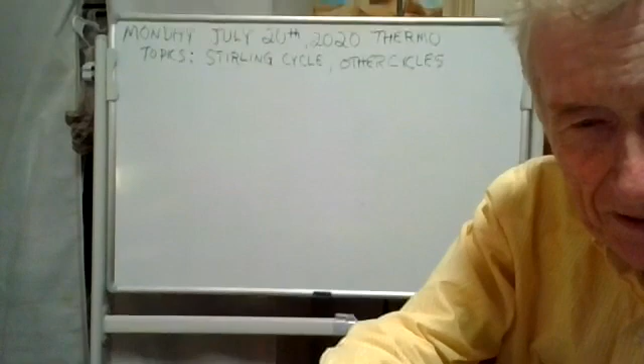So it's just you and me right now. How are you today, Spencer? No major complaints. As they say in the Ozarks, it's tolerable.

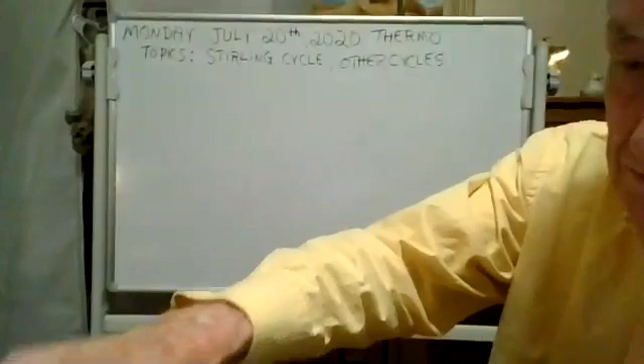Now today we're going to study really the last new topic, and that's the Stirling cycle. Then I'm going to go over some review stuff to prepare you for your final. And Wednesday, I don't think we're going to have anything new - it might be new to anybody that hadn't been paying attention, but I'd like to go over some of the important things in the course on Wednesday. But right now, the topic is the Stirling cycle.

And the Stirling cycle has - what we're talking about, the Stirling cycle - it has two isotherms, and two isochores.

I wonder if I'm writing big enough for you guys to read that. Maybe, I think you could probably read that. Let me find another one. This one's not dark enough.

So here, let me draw it for you. We're going to draw a Stirling cycle. Now we're dealing with air here - it doesn't have to be air, but it'll be an ideal gas. So we don't need a vapor dome.

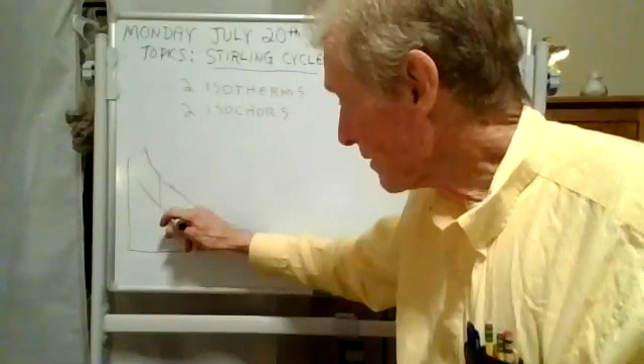So if you start here at 1, you go up this isotherm here to 2. And then you go up this isochore to 3. And then come down here to 4. And then down here to complete the cycle, you're back to where you started. It's a cycle, it's a Stirling cycle. See, this is compression here because the volume's getting smaller.

And then what are we going to call that? Well, there's an ignition there. There's a heat transfer in somehow. You have to have some fuel. These heat engines don't work unless you fill up the tank with gas or whatever it is you're using for fuel. So you have a heat transfer in there.

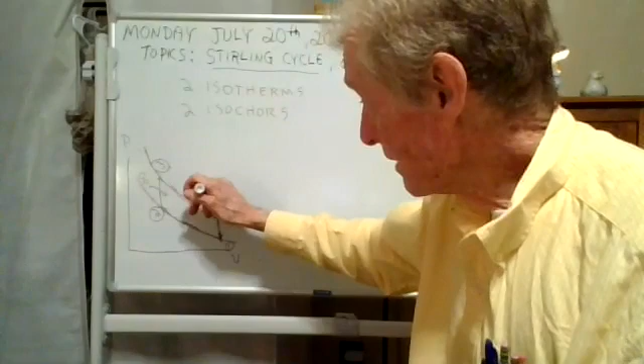And then 3 to 4 is your power stroke, but there's a heat transfer in there too. You could label these. This would be Q34, that would be Q23, and then there's a heat transfer out here. There's 4 heat transfers. This one's Q41.

But we don't speak of exhaust because the Stirling cycle is a control mass. There's no mass coming in and there's no mass going out. It's a cylinder, piston cylinder situation. Now here's the heat transfer during compression from 1 to 2. There's 4 heat transfers.

Okay, and it's a control mass. So you would use the control mass version of the first law, wouldn't you? All right, well, let's do one. Any questions so far?

Well, I think the one I want to do is 1081. Let me find it. Chapter 10, number 81, says here, ideal Stirling cycle.

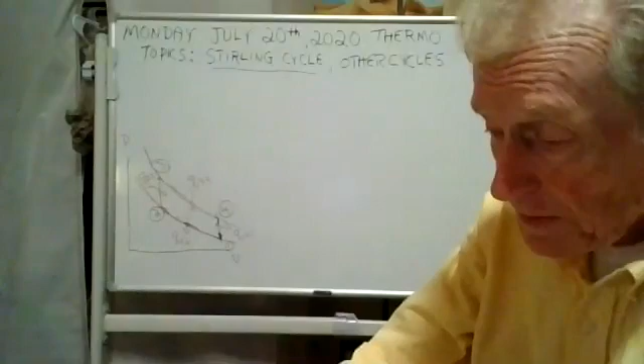You were doing an ideal Stirling cycle. Now you have to know that they have real Stirling cycles out in the real world. They exist. They have Stirling engines. They've had them for years and years and years. They've had them in the oil field for running oil field equipment. They've had them on boats. There's even a Stirling engine, it's actually a refrigeration cycle, on the space shuttle, I understand. So this is a real thing. It exists in the real world.

Now this one uses air, and it says here we start with 50 degrees Celsius. So here, let me write that. This is 50 degrees Celsius and 100 kilopascals. So over here, that's 100 kilopascal. Compression ratio is 6.

Well, let's make a note of that. R equals 6. In other words, V1 over V2 is 6. You could write it like that. You could say V1 over V2 is 6. Maximum temperature is 900. Well, that's this one here. This is the 900 degrees Celsius. See, the low temperature is 50, the high temperature is 900.

Calculate the maximum cycle pressure, we'll do that, and the thermal efficiency, we'll do that with and without regenerators. Well, we'll explain what regenerators are in a little while.

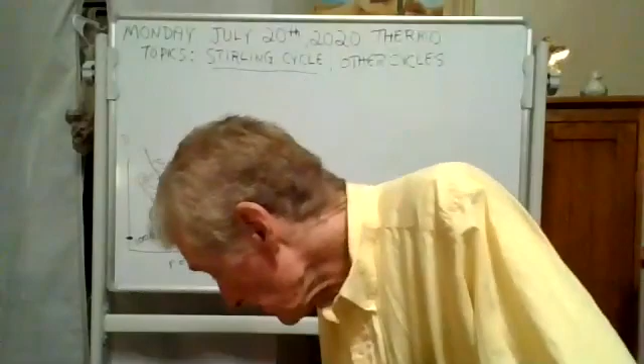This engine, if I remember, was invented before the Civil War, 1846, I think. But don't quote me. You could look it up on Google. But it's been around a long time.

And for a while there, in England, it was invented in England. For a while there, it was in competition with the steam engine. Now, they had the age of steam, but if the Stirling engine had been favored over the steam engine, it would have been the age of Stirling. But the steam engine was preferable, and I'll tell you why here later.

But let's go ahead and work our problem now. We're going to do problem 1081. And you know how I like to do these. We have so much fun doing these tables, these property tables that have energy transfers.

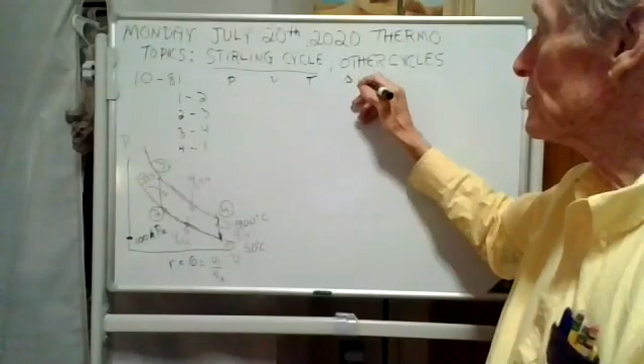And we're going to do a Stirling cycle. P, V, T, and delta U, Q, and W. There we go.

Now this one is in SI. It would also be fun to do one in English, wouldn't it? I bet you guys would like that too.

Okay, well now according to the problem, we're going to do 1081. If somebody just showed up, we're doing a Stirling cycle. Let's see if there's any new students that showed up here. Let's see. Parker, yay, Parker showed up. We got a good crowd here.

Anyway, we're going to do problem 1081. It's a Stirling cycle. And they said at state 1, temperature is 50 Celsius. We might have to change that to Kelvin later, but it's okay right now. And then the pressure is 100 kilopascals. Kind of ran out of room there. Let's see if we can squeeze it in here. Kilopascal.

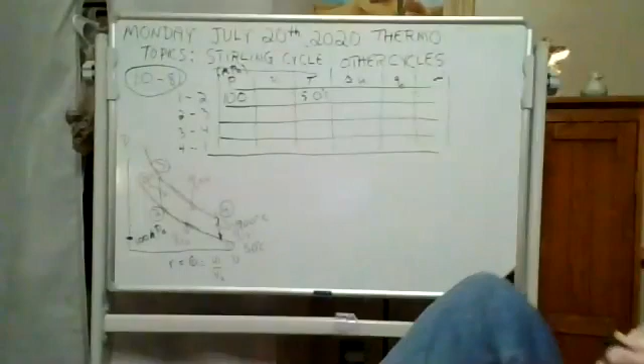Okay, let's take time out. And what I want you to do is to find the specific volume. Okay, go for it. It's state 1. Don't forget, it's got to be in Kelvin or it's no good.

Are we using air for this? Yes, this is air. We are talking about air. But thank you for asking. Well, I got an answer. I'm not at all sure it's right. Let me do it again.

Well, I got an answer. Did anybody get 0.9274 cubic meters per kilogram? That's what I got. I bet that's right. We're off. We're doing great.

Now, if the compression ratio is 6, then you can get V2, just divide that by 6. Here we go. We're going to divide that by 6. Get your calculator.

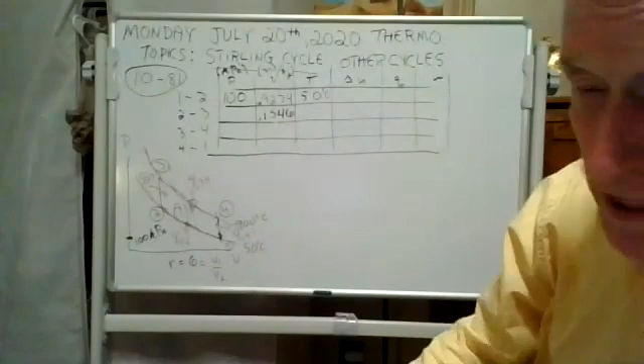Okay, well, we got the V2, if you understood that. Now here's the beautiful thing. V2 and V3 are the same, so you can fill those in. Look at there. Isn't that nice?

Not only that, I can fill in V4. V4 is the same as V1. Can you guys see that? It's 0.9274. Any questions?

Okay. Now, what do we know about these temperatures? Well, see, state 2, you know what? The temperature at state 2 is the same as it is at 1. You're going to like this. This is a nice little problem here. It's easy. And see, the temperatures at 3 and 4 are both 900.

Now, we did these in degrees Celsius. That's fine. You have to put it in Kelvin though when you use the ideal gas law. Okay, now we're going to take time out here for just a minute, and we're going to use the ideal gas law to get these three. I'll be quiet, and I want you to get those three for me. On your mark, get set, go.

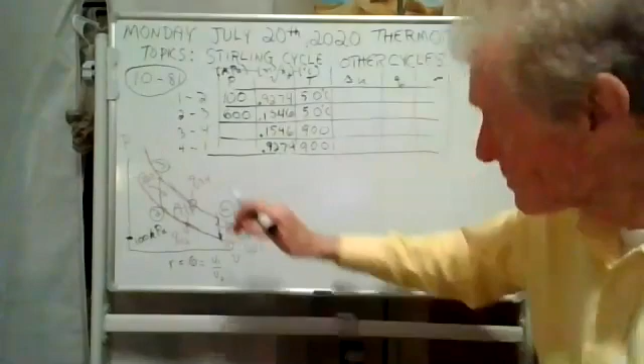Well, I got some answers. I got 600 here, 600 kilopascals, and I got 2178 for this one. Kilopascals.

I got to check up on you guys. I got to make sure that people are still awake out there. Let me ask one of my wonderful students, Spencer. Spencer, do you have this pressure at state 4 yet? Do you have that yet, Spencer? 363.04 kilopascals. That's what I got.

So you guys are with me. I think we're doing fine. Now let's do this, the change in specific internal energy. That's what that is. Okay, well, here's the equation.

It goes like this. Now this equation doesn't always work. It only works if you have an ideal gas, but we do. We can treat air like an ideal gas, so it's good. But see, going from 1 to 2, there is no change in temperature, so this is 0.

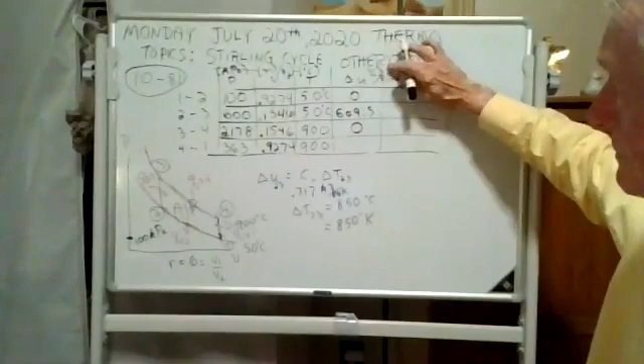Now what about from 4 to 1? Well, you know what? It'd be the same. It's just negative. It's the same change. It's just that you're getting colder from 4 to 1.

Does anybody need my help? I'll write that out if anybody asks. Okay. Nobody asks, so I guess you're all right.

Now, 2 of these W's are 0. Two of these little W's are 0. And let me pick on one of my wonderful students here. Parker, unmute and tell me which ones of these work per masses over here are 0. Which ones are 0, Parker?

Would it be 2 to 3 and 4 to 1? I like it. Good going, Parker. I think you guys are beginning to catch on to stuff in this class. Well, that's good.

Now, how are we gonna figure the rest? Do you guys have any bright ideas? We need to fill in these boxes here. How about it? I'm listening for some good ideas. Go for it.

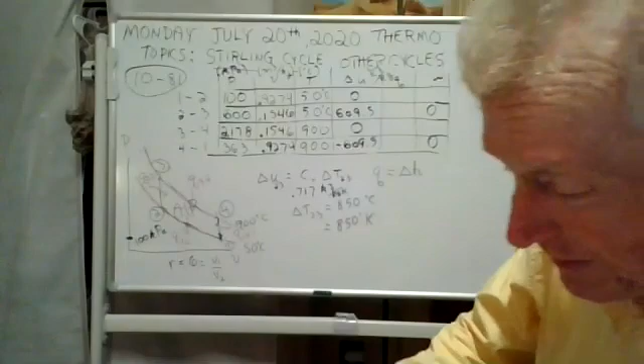But still stay away from the gambling, Cameron, it's not a good deal. The casino, yeah, stay away from the casino. But you're right, you can't use that. Now, Cameron, why is it that we can't use it?

There was a skull and crossbones on that equation here, let me put the skull and crossbones back on there. There's a reason why you can't use that equation on any of these. Cameron, what is the reason? You're right, Cameron's right, you cannot use this equation, for instance, to find these heat transfers anywhere here.

But why? Why can't you, Cameron? Because there's no specific heat. I'm not sure. Well, let me ask you this way, Cameron: when can you use this equation? When is this equation good?

It's only good if you have a very special kind of process. What is that process? Is it specific enthalpy? No, that's not a process. There are different kinds of processes like isos of this and isos of that, but this only works for a particular kind of process, Cameron. What kind of process do you have to use this equation? I'm not sure, I'm not seeing it in my notes.

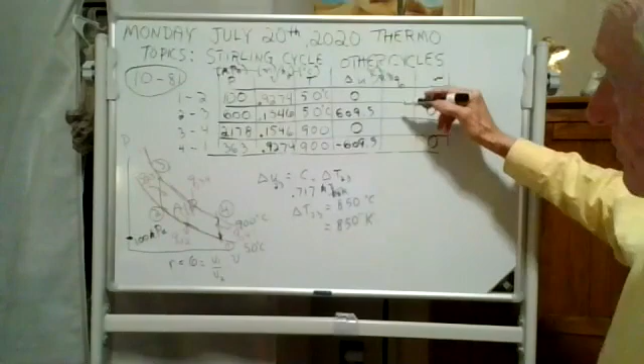Okay, well, we're back to asking you guys for some advice. That didn't work. Does anybody out there have any idea how to fill in those boxes? We've got 6 empty boxes there, and we need to fill them in. I'm waiting for some advice. Well, this might be a long wait.

Let me pick on somebody else. Aubrey, help the class. Aubrey, do you have any idea how to fill in those empty boxes? I know we can fill in a few using delta U equals Q minus W. Good idea, Aubrey, let me write that down. Aubrey's got a good idea.

Did I write that big enough? Yeah, you can read that. Hey, look at here, we can get these two, Aubrey, just from here, because if you know this and you know this, well, you can solve for that. Now, Aubrey, this one's going to be plus or minus.

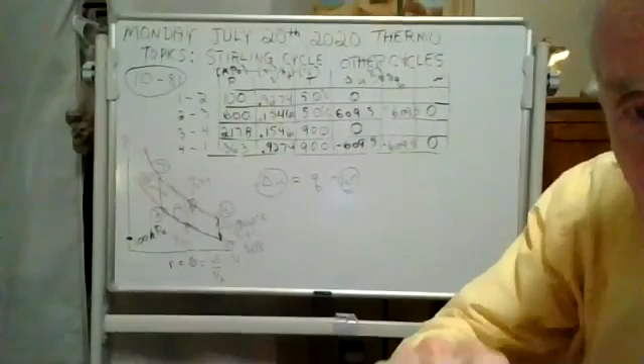empty boxes. Let me go to one of my other wonderful students. I'm always picking on Stuart. Stuart, the class needs those 4 empty boxes filled in. Do you have any ideas how to do those? Uh-oh, Stuart's not answering me. He's probably tired of me picking on him.

Can we use CP delta T? Let me try that. Now, there is a lovely equation that goes like this. We could get our delta specific enthalpy this way for sure. But that doesn't give you the Q, because the Q is not going to equal the delta H because we've just discussed that. There's no isobar, so I don't think that's going to help us any.

Well, let's go to my next victim here. Spencer, we got 4 empty boxes here. What are we going to do? Got any ideas? To find the work, maybe we could use RT ln V4 over V3. That's it. Good going, Spencer.

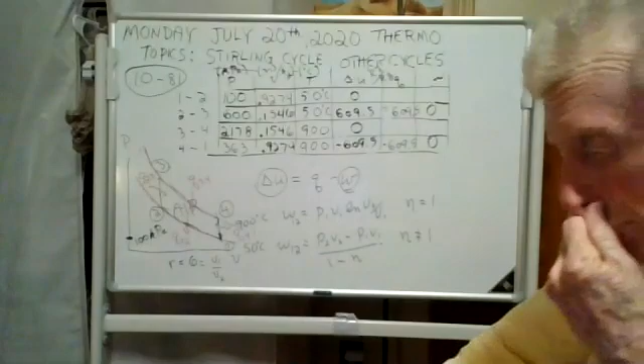See, this one here is when your polytropic constant is equal to 1. And this one here is when your polytropic constant is not equal to 1. Well, going from 1 to 2, the polytropic constant is equal to 1 because P1 V1 to the 1 power equals RT, and T is a constant. And so P1 V1 is equal to P2 V2 to the 1. The polytropic constant is a 1 for process 1 to 2.

This is the one we can use. You don't use this one, because if n is 1, you have a 1 minus a 1 in the denominator. And that is bad. Can't have a 0 in the denominator. You got to know when you can use these two equations. But we can use this equation here.

Did I explain that n is equal to 1? Do you understand? From 1 to 2? Because see, the T is a constant, the temperature is a constant. Okay, well, I hope you understand. All right, let's go ahead and work this out.

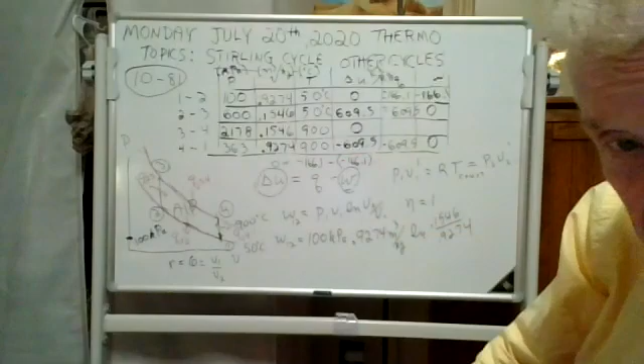It's going out. And algebraically, look, if this is 0, and if this is minus 166.1, and there's a subtraction, and this is minus 166.1, algebraically, it works, doesn't it? Can you guys read that? I wrote awfully small. But see, there's a heat transfer going out. It's negative. So you want a negative right there.

Now let's do from 3 to 4. We got 2 more boxes, and you know how to do them now. I'll shut up a minute and let you do those.

What we're doing right now is we're filling in these last 2 boxes, and we're actually doing this equation from 3 to 4. Here, I'll put in the 3 to 4 for you. From 3 to 4. See if you can get the work from 3 to 4.

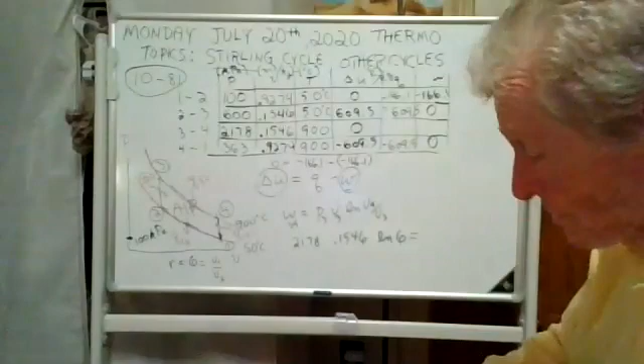Put that in your calculators and tell me what you get. I'm using my phone as a calculator. That's- okay, I'm doing the log part right. You should, maybe you did common logs. We want natural logs, maybe that's the problem.

Yeah, I would think- Never mind, I do. There's a difference between natural logs and common logs.

.32, that's more like it. 603 point- I got 3. I think we rounded off.

Now see, you can get this by using what Aubrey suggested. Look here, if you know this and this, you can get that. And I'll tell you what, it's going to be a plus or minus 603.3. What do you think, Parker? Plus or minus 603.3 right here? Plus, yes, it's plus. Good going.

Excellent. Now, does anybody need help with any of that, or are you okay?

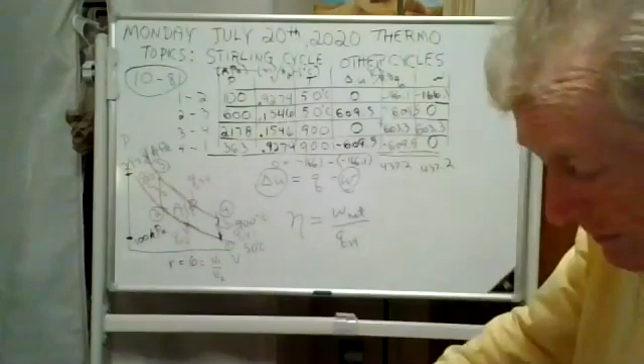But now wait a minute, there's 2 heats that you have to pay for. This heat, you don't get that heat free. It comes from burning diesel or gas, they have very many different kinds. They even have geothermal, they even have a geothermal heat source, but you have to get the heat from someplace.

But see here, the total heat transfer, you'd have to add the Q23. You'd have to add them up. See, there's 2 heat sources, so you'd have to add them up. So here's what you'd get: you get 437.2 over Q23, and well, you'd have to add these. That'd be 609.5 plus 603.3.

Let me add those up and we'll see what we get here. 437.2 divided by 609.5 plus 603.3. Did you get 36%? We have a 36% efficient Stirling engine.

Now, what they did back in the early days, and what they still do, is a very clever thing. It's called a regenerator. You see this heat transfer right here, this 4-1? They take that heat transfer out, and instead of just heating up Oklahoma with it, they recycle it around, and somehow they take that heat transfer, and instead of just wasting it, heating up Oklahoma, they put it back into the air inside your Stirling engine.

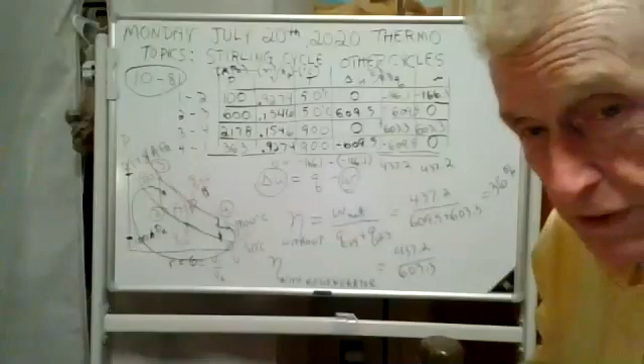Now, what that regenerator is - in the early days it's like a big box with a bunch of real fine tin foil, a steel wool. Did you know that steel wool can heat up and cool off 50 times a second? Do you believe me?

See, if this engine is spinning 50 times a second, what is that a minute? What's 50 times 60? Is that 600? No, wait a minute, I can't do it in my head, it's too hard. 50 times 60 is, you're right, it's 3,000 RPM, isn't it? That's what your cars are doing - you've got 3,000 RPM on your tachometer there.

Well, what we're saying is that steel wool, real fine steel wool in that regenerator, is heating up and cooling off 50 times a second. Gosh, that's pretty amazing. But so is the air in the engine - it's going from 900 Celsius to 50 Celsius 50 times a second. That's just a ballpark figure, okay? It might be going more or less than 50 times a second.

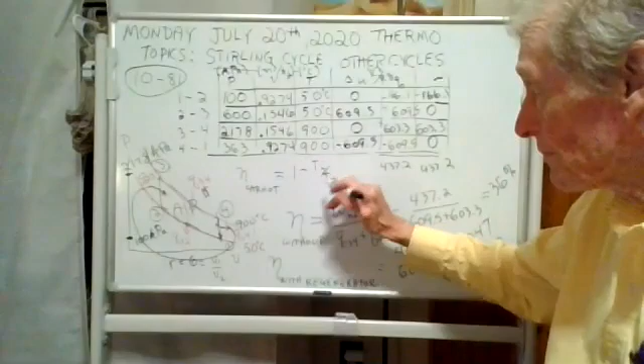Well, okay, I guess you're pretty happy with that. Now I need a little bit of room - here's some room right here. Now we've done the efficiency without a regenerator and the efficiency with a regenerator. And a while back we studied the Carnot efficiency. I don't know if you remember this equation, it's in your book. These have to be in Kelvin, but that's the equation for the efficiency of a Carnot engine.

Now this is not a Carnot engine, but let's just see what the efficiency would be if you use these temperatures. Well, it'd be 1 minus - you'd have to have that in Kelvin. Let me put 50 in Kelvin. I'm getting 323.15. And then this would be the 900.

I can't do that in my head. 900 plus 273, that would be 1173.15. Okay, now we're going to do that, and we're going to see what a Carnot engine efficiency would be operating between the same two temperatures.

Okay, well here goes, I'm doing that now - 323.15, and then you have to subtract it from 1. Well, here's what I'm getting: 0.7245. Well, I think there's a round-off thing, but look here - it comes out the same. It's a matter of a rounding off, I think.

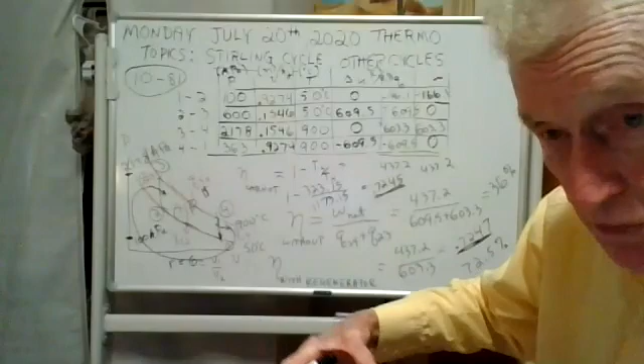So the Stirling is coming back. Now, the steam engine had problems too. The problem is you get terrific pressure built up when steam starts pushing against the container it's in, and if it's not built strong enough, it can blow up. They've had many explosions.

Steam engines have exploded. There was a steam locomotive over by Carthage, Missouri that exploded. The pressure got too much, and pieces of that engine—I forget how far away they went, but a long way, a mile or two. How would you like to be walking along and have a chunk of a steam engine come plopping down beside you?

So that was a big problem. People were being killed because of these explosions. But here's the thing, back in 1850 or so, they didn't have all the safeguards they have now. We have OSHA, workman's comp, occupational safety things, insurance. Back then, if someone was killed, they'd just say we need another worker, and there'd be a whole line of people waiting to get the job. Times were tough in those days. So they went with the steam engine in spite of its problems.

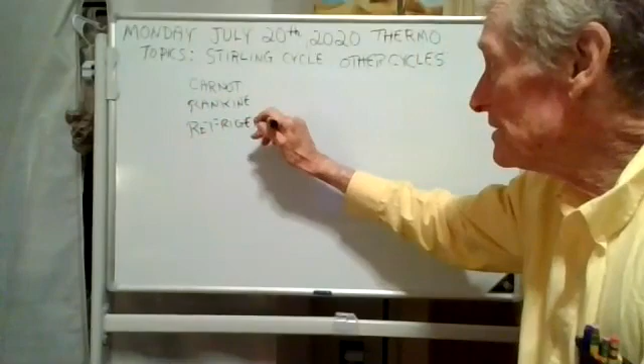Now, on your final, we've studied numerous cycles. Let me tell you what they are. We've studied the Carnot cycle, the Rankine cycle, and refrigeration. We've studied Otto, Diesel, Stirling. You will have one of those on your final, but we've done them all, and I'm sure you'll do fine. There'll be one of those tables of property tables with energy transfers with a lot of boxes for you to fill out. Each box is probably worth a point. We've studied all those different engines, haven't we?

Now let me tell you how the Stirling works. These are cycles that are going to be on your final exam. Now the Stirling engine, it's got a piston cylinder. See, this is the crankshaft, and it's spinning.

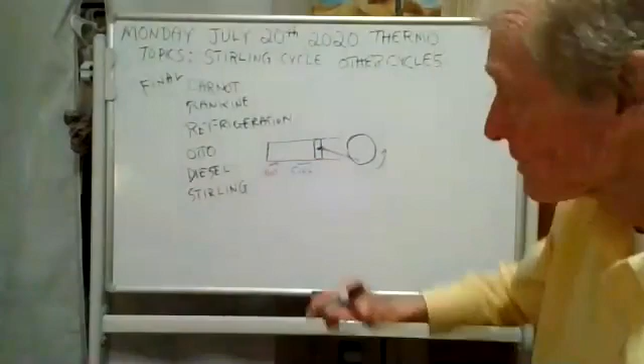They have something called a displacer. Now, it is not flush with your cylinder—it's called the displacer. When the displacer is going this way, what happens is the cool air is pushed around here, and it makes the air inside your cylinder cooler. And when that happens, when it gets cooler, the air contracts and the piston...

Let me do it this way. When the displacer is going that way, the crankshaft is turning this way, and the piston moves this way, and the volume gets smaller. Now, when the displacer goes this way, the very hot air here is pushed around, and the air in the piston gets hotter. But by that time, you're in a different position.

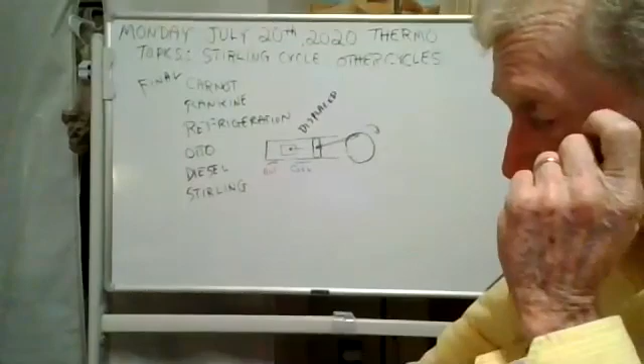You're like this, and the piston's turning like that, and the volume inside the piston is getting bigger. I don't know if that made a lot of sense, but that's the basic idea.

They have what they call a displacer that moves back and forth, let's just say 50 times a second. This thing here is turning 50 times a second. And if they're in sync—that's the secret. The secret is to get the displacer and the crankshaft in sync.

Well, they can do that. They're connected—the displacer is connected to the crankshaft, and it's going back and forth, making the air inside the piston hot and cold 50 times a second. Does that make sense? That makes it expand and contract 50 times a second, and that pushes the piston back and forth 50 times a second. That's the whole idea.

Well, I showed you that, and we talked about the Stirling engine. Now, in the actual Stirling engines they have this separate—they have the working piston and the displacer. They have them separate, but connected. Let's see if I can show you that.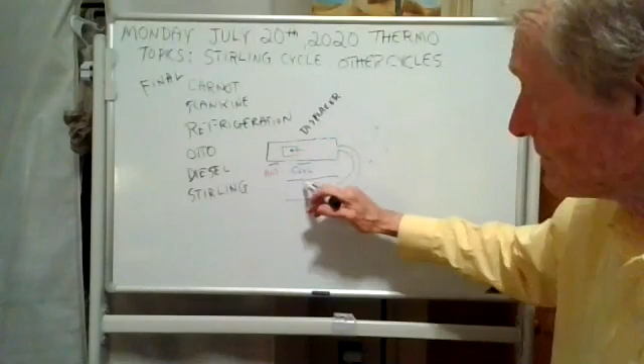Here, the displacer is separate from the piston cylinder. They're totally separate. But the air is contained in this displacer box and in the working piston. It's the same air. It can't get in, it can't get out. There's no mass that can get in or out. Whatever air is in here, in this connection, and where the displacer is, no air is being added or subtracted.

Nothing is said about a spark plug. I didn't mention anything about spark plugs. It doesn't have one. A Stirling engine does not have spark plugs. That's kind of nice. It's simple, really.

Are steam engines pretty similar to a diesel engine? Well, there's something you need to know about steam engines. Steam engines are external combustion. The firebox, the fire, is not internal.

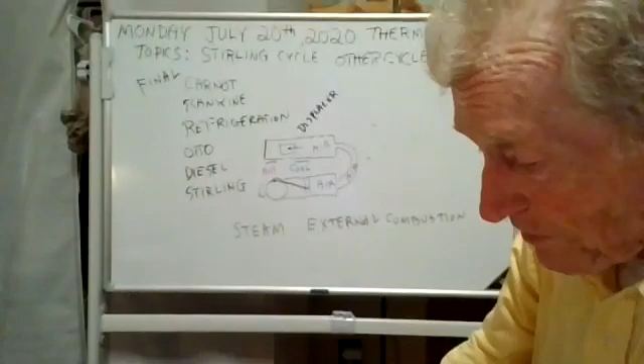But a gas auto engine or a diesel engine, for instance, is internal combustion. I don't know if you've ever taken the head off of an engine, but there's crud in there, soot and carbon build up inside. You have to scrape it off with a putty knife. They're dirty inside. The reason is you're burning fuel inside the piston.

Here, let me draw a piston for you. Here's a piston, and there's a spark plug right here. And there's some wires, and bam, there's an explosion in here, and you're burning fuel inside. See, Otto and diesel cycles are internal combustion.

And you don't always get a 100% burn. There might be some residue, some carbon monoxide, even incomplete burn. But steam engines are external combustion. You can get a complete burn, and Stirling engines are too.

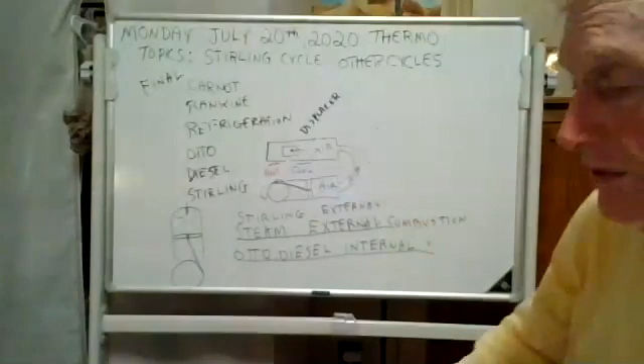Stirling engines are external combustion, and with external combustion you can get a complete burn. You can get all the oxygen you need. There's no nitrous oxide or sulfur dioxide or carbon residue. You can get a complete burn. Stirling engines are good for the environment because they don't produce the pollution.

You know what produces pollution? Cars. Yeah, cars. Now they've come a long way to reduce that pollution with cars. I can remember going to Los Angeles back in the old days when smog was just terrible. They've really cleaned up Los Angeles. If you've been there, you can have clear skies and see the snow-capped mountains surrounding Los Angeles these days.

Because they've made a lot of progress. But now you know there's external and internal combustion engines, and Stirling is external. The nice thing about the Stirling is you can use any fuel. You can use, like I was telling you, geothermal. You can even use solar.

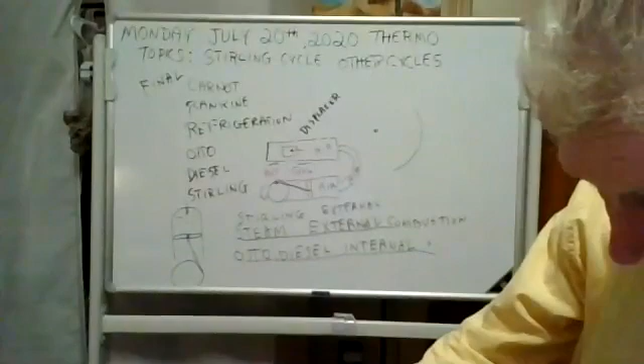Well, it's interesting, and if you are interested in the Stirling engine, just go to Google, type in Stirling engine, Stirling cycle, and you'll find pages and pages of stuff. It's got a lot of advantages.

Now, what about disadvantages? Well, one of the disadvantages of the Stirling is it takes time for it to crank up. That's the beauty of a gas engine car—you go out to your car, turn the key, boom, put it into drive, and back out of your driveway. Well, with the Stirling, you have to build up that heat source. It takes a little while for that heat source to build up, to get hot, to run your Stirling engine, and people don't have time to wait around. But there's ways to get around that.

You could have a hybrid where you have a small gasoline engine to get you started, and then the Stirling kicks in. Anyway, it's a fascinating topic. Okay, we're going to have a question or comment from anyone. If not, we're going to take a 10-minute break here pretty soon and talk about other cycles. The topic today, after the Stirling, is other cycles. Do you have any comments or questions for me?

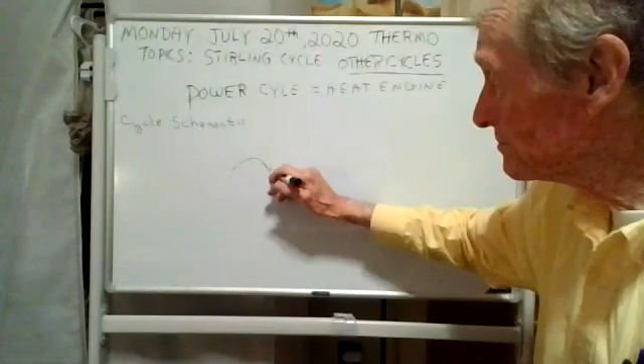I use a schematic, I call it a cycle schematic. And for a power cycle, it looks kind of like this.

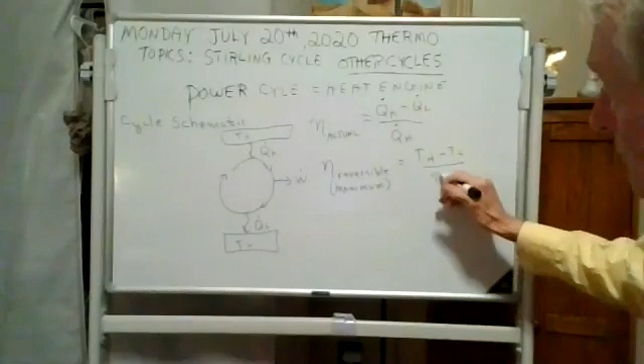And there's some equations that go with it. There's an actual efficiency equation, and then there's a reversible, or you could call it maximum if you wanted, efficiency - the maximum possible efficiency if the thing ran perfect. This equation goes like this, and that equation goes like this. These are all in your book. We've had them before, but I think it's worthwhile for you to understand them.

And I'd like to do a problem. Now this problem that I picked out is example 5.3. It's in your book, called example 5.3. So let's dig it out and do it.

We're kind of having a review here. I don't know if everybody needs this review, but judging from the last test that you guys took, there's some of you that do. Some of you need this review.

Okay, let me find this example 5.3. Okay, there it is, I found it. It's in the book there. Let me just see if everybody's here. Yeah, we got a good group. We got Bear with us now. Good deal, we got a good group.

If you tuned in late, we went over a Stirling cycle. Well, you could watch the YouTube over again, that wouldn't hurt you. But right now we're reviewing power cycles, refrigeration cycles, and heat pump cycles.

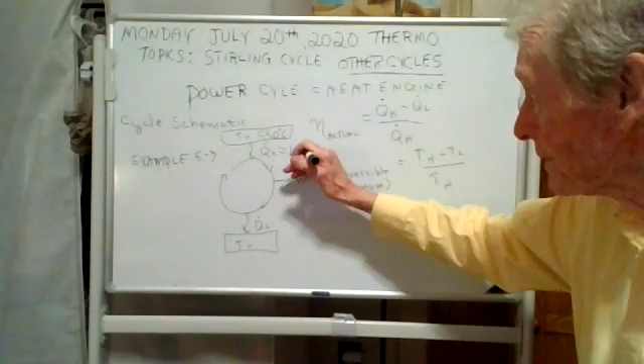I'll put my megawatt in brackets there. Now I might need Kelvin, let me find the Kelvin just a minute. 550 plus the 273, that's 823 Kelvin. Now let me keep reading.

I'm reading this out of the book, it's called Example 5.3. It's a power cycle, and it rejects energy to the surroundings, ambient surroundings. Ambient is just a fancy word for atmosphere, at 300 K. Okay, well, this is 300 K. All right, 300 K. Work is produced at a rate of 450 kilowatts.

Well, that's this here, this is 450 kilowatts. I'll put my units in brackets. See, this is not a unit here, this is the symbol for power. 450 kilo. We would like to know how much energy is discarded to the ambient surroundings. I think they want us to find this QL dot and the engine efficiency and compare those to a Carnot heat engine operating between the same two reservoirs.

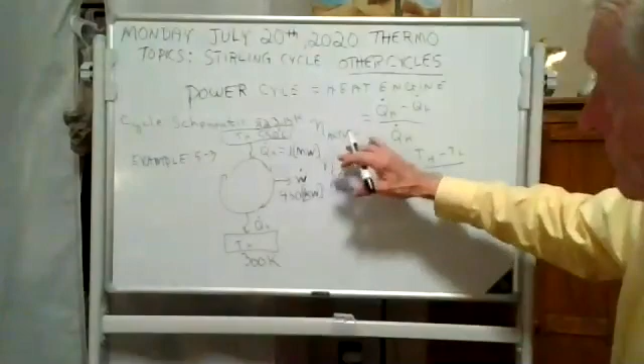Okay, now I'm not going to peek and look at the answers. They've solved the problem, but I'm not going to cheat. I'm going to see if I can figure out the answers without looking at them there. Okay, well, the actual is - see, here's the problem, I don't know what that is.

Don't know what that is. Well, no, wait a minute, I can figure it out though. Look, 1 megawatt, you know what that is? That's 1,000 kilowatts. You got 1,000 kilowatts coming in, 450 going out.

So you know what this has to be? This has to be 550 kilowatts because, well, if 1,000 comes in, these two have to add up to 1,000. That's it. Hey, we just figured out what the heat transfer rate was to the atmosphere. See, this is the atmosphere here.

Okay, now let's get these. Well, you just subtract these. You got 1,000 minus the 550, that's 450. That goes here. And then you divide by the 1,000. And what you get is 0.45.

Well, we just did the actual efficiency. It should be 0.45. Okay, now let's do the reversible efficiency, or they call it the Carnot efficiency. Some people call it the Carnot efficiency.

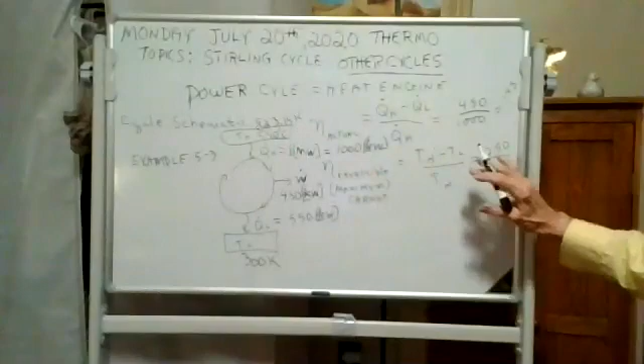Do I need to explain how it doesn't matter about the change? Somebody speak up if they want me to explain that 250 better. But here you must use the Kelvin. Isn't the difference a lot larger because the 550 is in Celsius and 300 is Kelvin?

Yeah, let's do that. Is that my friend Spencer? Is that who that is? Yes sir. Okay Spencer, look. TH is 550 Celsius, which is 823.15 Kelvin.

TL, I'm so glad you asked. Now, they never did tell us what it was in Celsius, but I'm going to get it. Just one tiny minute here. I'm getting 26.85 Celsius. See, that's atmospheric temperature, and that's equal to 300 Kelvin.

Now, if you subtract these, wonder if I did that right. Did I goof up? I think so. I was getting... Hey, you're absolutely right. I'm going to give you a honking thank you point. I'm absolutely wrong, this is not 250.

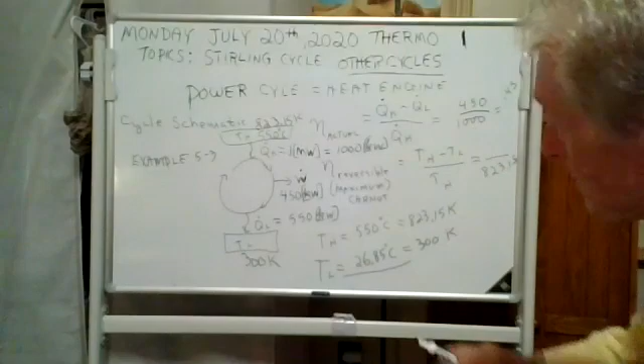These will both give you the same answer when you subtract. I think when you subtract this, you get, is it 523? Yeah, 523.15 is what I got. Yeah, I appreciate that. But now when you subtract these, let me do that. Should be the same.

And I do appreciate you so very much. Hey, guess what? You get 523.15 when you subtract these. You get 523.15. Okay, now we're going to get the

Carnot efficiency, and here we go. And you divide that by 823.15. And we get 0.6355, which is 63.6%. Hey, you know what?

The Carnot efficiency, the maximum efficiency, is bigger than the actual efficiency. And I think that was my friend Spencer that got that thank you point. And we appreciate any student that stays awake during my discussions here and helps us.

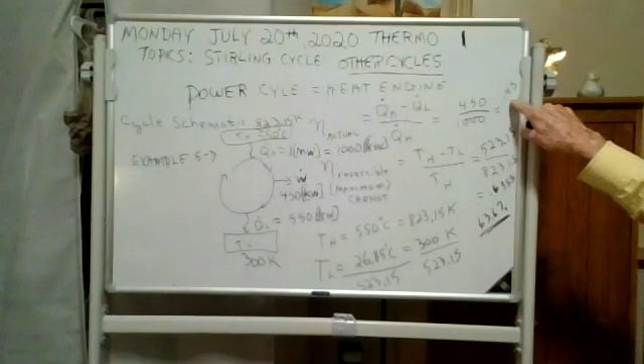So now let's peek and see what they said the answers were. See, I haven't peeked yet. I'm going to see what they said. They said the efficiency is 0.45. Yay, that's what the book says. And they said the Carnot efficiency is 0.635.

Well, I must have rounded off, but I'm pretty happy with that. And then they said that the power is 635. I'm getting confused now. I'm reading what the book says here. They said that the heat transfer rate, the low temperature is 365. We didn't get that. We got that. Well, I'm confused.

I think we did everything correctly here, except up on the next page. I think what they're saying is instead of getting 450, if this was a Carnot engine, you would have gotten 636 or 635. That's what they're doing. They're showing you if the thing ran reversibly, what you'd get. Well, it's not going to run reversibly. It's going to run like this, and this is what you actually get.

Okay, now we're going to do a refrigeration cycle now, and then later we'll do a heat pump cycle. So right now, we're going to do a refrigeration cycle. And this is example 5.4 in your book. It's example 5.4 in your book, okay.

Well, let's start with the cycle schematic. We're going to start with the cycle schematic.

And you do that counterclockwise, like that. Everything is just backwards. The QL dot is going into, here's your low temperature, here's your high temperature. The QH dot is leaving your refrigerant.

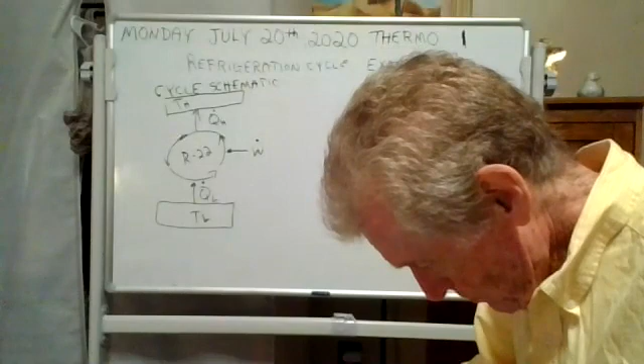Works as a refrigerator, show. 4 kilowatts removed from the room at 24 Celsius. I get the feeling that this is the 24 degrees Celsius room, and we're removing 4 kilowatts. Put those in brackets. Let me keep reading.

To the outside atmosphere at 35. This is the outside, it's 35 degrees Celsius. We would like to estimate the magnitude of the required work. To do this, we will not analyze the processes inside the refrigerator, which is deferred to chapter 9, which we studied - we've done chapter 9. But we'll give a lower limit for the rate of work, assuming it is a Carnot cycle refrigerator.

Okay, now I'm going to put this away and not peek. I don't want to see what the answers are. I want to see if I can do this without looking at the answers.

Here's what they're doing in this. They're saying that they don't use eta, they use a beta. They're saying that the actual beta and the reversible beta, we're going to set them equal to each other. We're going to pretend that this is a perfectly no irreversibilities involved refrigerator. We're going to set them equal.

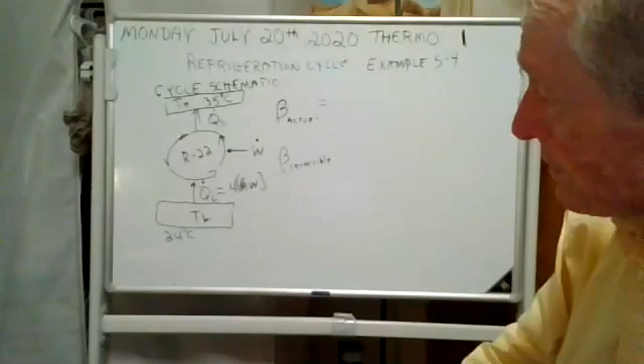Now the equation goes like this for the actual beta. You always have in the numerator what you desire. Well, what we desire is the QL, we desire the QL dot. That's why we bought the refrigerator, to remove heat from our house, let's say, or your car, or your hot dogs, or whatever you're trying to keep cool.

And here you have to divide by the power. This costs you money, you have to plug in that refrigerator. Now, according to the first law, that's equal to QH dot minus QL dot. There's your equation for your actual, they call it coefficient of performance.

Okay, now let's do the reversible. Now the reversible coefficient of performance, it's based on your Kelvin temperatures. And here they are. So what we're going to do is we're going to set these equations equal.

Okay, well, let's circle the stuff we know. We know QL dot, let me circle that. We know that. We know all the temperatures, only they have to be in Kelvin. So here, let me convert those to Kelvin.

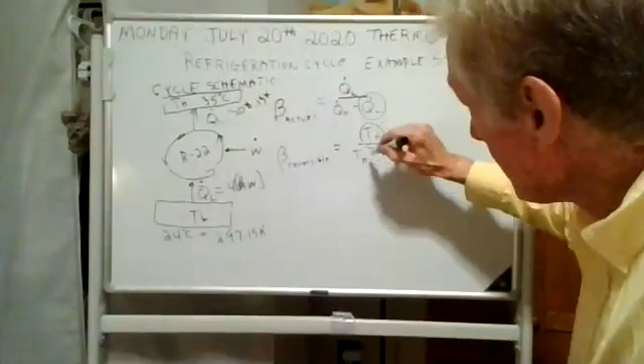All right, now we know all of those. We know all the temperatures. Now, if you set these equal - oh, I know that. There's only one unknown. We can do this. There's only one unknown, here, let me get this first.

You would take the 308, and then you would divide by - wouldn't it just be 11? Did I do that right? What's 24 from 35? It's 11, isn't it? Yeah, okay, let's see what we get here. I'm getting 28.01.

And let's write our equation now. QL is 4. I'm writing my equation now. We all took algebra in school, I know we can do this.

Here, let me shut up for a minute and a half. I want you to solve for this heat transfer rate at the high temperature. I'm going to do it on a piece of paper, I can't do that in my head. So let's do that now. Go for it, see if you can do it.

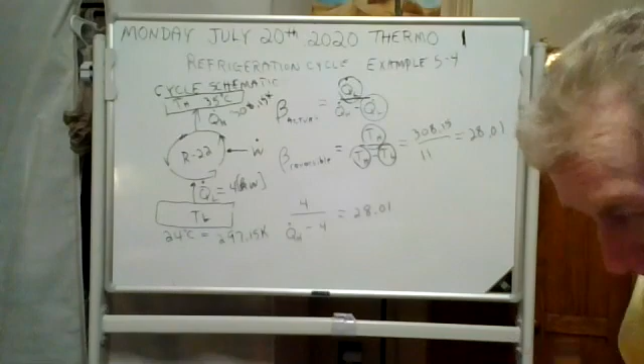Did I get this right? Yeah, I think I did. Okay, I'm solving this now. What we're doing right now is we're solving this. We're going to find this heat transfer rate at the high temperature.

Well, I got an answer. Did you get QH dot is equal to 4.143 kilowatts? Anybody get that? That's what I got, good. Same. Yay, I bet that's right.

So now we know what that is, it's 4.143 kilowatts. And so now we can find the power required. Now this is the minimum power required. In an actual refrigeration cycle, you're going to have more than that, but this is what you'd have. Let's see, now we have 4 coming in, 4.143 going out.

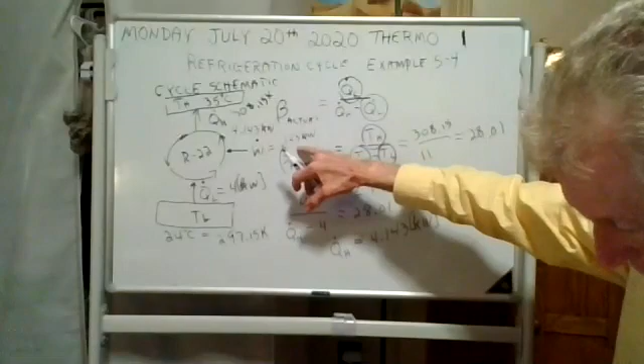Now let's look and see. Now I'm going to peek and see what the book says. Okay, now they said they got a beta of 27. How come I got 28 and they got 27? And they got an answer of 0.15 kilowatts. We came close to their answers, but I wonder why they're slightly different.

I think the whole thing is we use 273.15 and they just use 273. See, they said 35 plus 273, and they got 308, and divided that by 11. When you take 308 and divide by 11, well, I still get 28. How'd they get 27? I think they made a mistake, actually.

They did pretty good, but I think we did better. Here, let me write what they did. They're usually right, which is the thing that bothers me. I need some room right here. Here's some room, here's what they did.

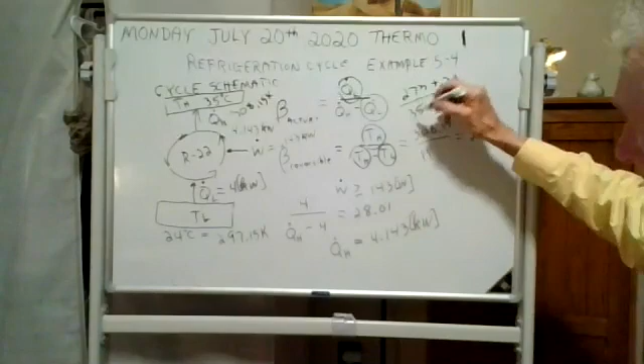They said 273 plus 24, over 35 minus 24. They said that's equal to 27. All right, now you do it, let's see what you get when you do that. 273 plus 24 divided by, well, that's just 11, right? No, it is 27.

I still think we did it right, though, because if you take 273.15, I think it makes us a tiny bit of difference. Or let's don't fuss over that. It's a matter of they rounded off. They got a pretty good answer. I'm pretty happy with that.

Before we do the heat pump, I want to show you something else about my particular air conditioner. But did anyone have a comment or question about example 5.4?

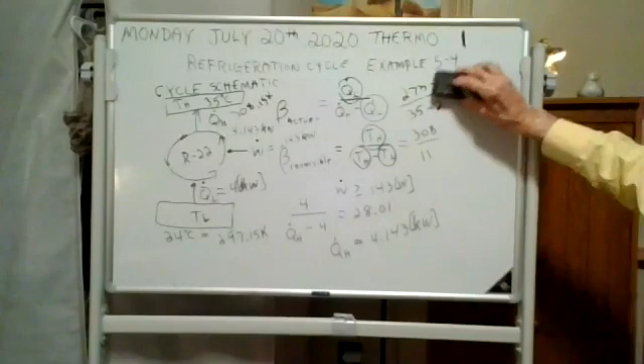Well, okay, if you're happy with it, I want to tell you about my air conditioner. So if it's all right, I'm going to erase this. We're going to do my air conditioner for my house. And nobody said anything. All right, well, goodbye, example 5.4.

Now I went outside to my house, and on my air conditioner it said, well, first of all, there's these little plates there. And it said 24 amps on the little plate there on my air conditioner. And it says 230 volts. We got the amps, we got the volts.

And we've studied, I know we've had a course in this. Does anyone remember P equals IV? Let me go to one of my wonderful students here. Bear, did you ever see that equation, power equals current times voltage? Have you ever seen that, Bear? Yes, sir, I saw it in physics. Yeah, absolutely, you'll see it there, or you'll see it other places.

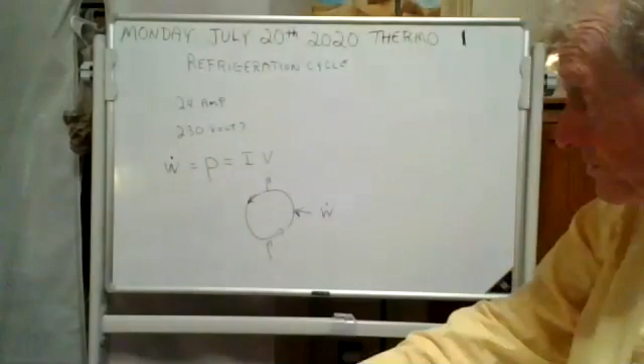So I'm going to shut up and I want you to tell me the power. We have the amps, that's, I don't know why they pick I for current, but they do. And we have the volts. We have the amps, we have the volts. So what is the power? Go for it, you have 30 seconds.

All right, now let me pick on one of my wonderful students here. Aubrey, I'm back to Aubrey. Aubrey, what'd you get for the power on my air conditioner? I got 5,520 watts. That's exactly what I got. Now we might want kilowatts, so let's make this 5.520 kilowatts. Okay, great, we just figured this out, we'll put a circle around it, we got that.

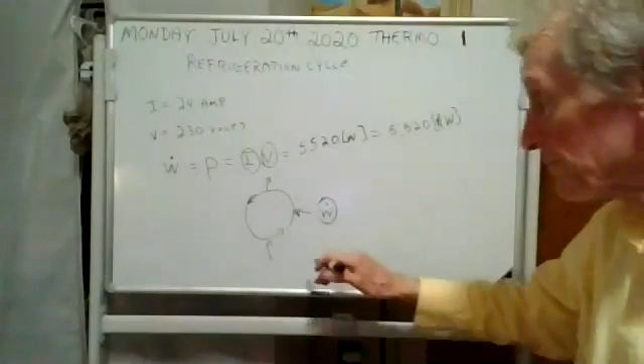Now, this right here, this QL dot, they have a name for that. They call that the, oh gee, having a little trouble here on my memory. It's called the refrigeration capacity, I think is the name of it, and it's measured in tons. Now what I have is a 4-ton heat capacity, I think is a fancy name for it. All it is, is the QL dot. It's the heat transfer rate.

From my house, in this case we're having a heat transfer from my house, and we have a 4-ton heat transfer. Now I'll explain why they call it that. Well, I'll just tell you, it has to do with back in the days when they had ice houses. Well, they still have ice houses. But what a ton of refrigeration is, is the heat transfer rate to freeze a ton of water at 32 Fahrenheit or 0 Celsius.

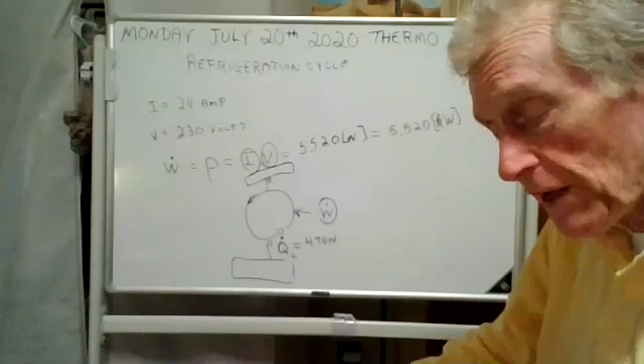If you have a ton of water and you want to freeze it, you have to remove heat energy from that water and it will freeze. It won't freeze unless you remove the heat energy from it. And 1 ton of refrigeration is the amount of heat transfer rate in 24 hours that will freeze a ton of water.

That's where they got the name ton of refrigeration. But let me tell you what it's equal to. 1 ton of refrigeration is equal to 211 kilojoules per minute.

Now we need kilojoules per second. If you wanted this in kilojoules per second, you'd have to divide by 60. Let me see what that is. It's 3.52 kilojoules per second, or in other words, kilowatts. That's what a ton of refrigeration is.

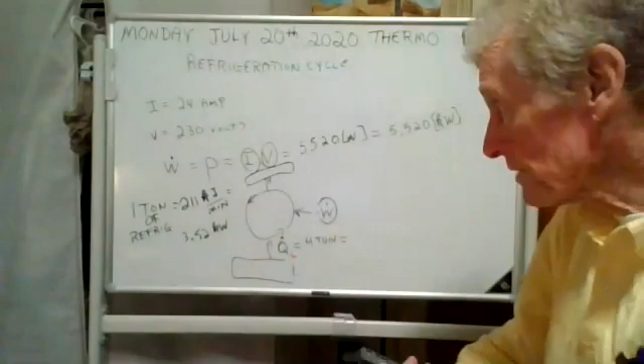Well, I've got a 4-ton unit on my house. So if I have 4 of these, I have 4 times that. So multiply that by 4. What I have is 14.07 kilowatts.

Okay, so here's what we got. We got 14.07 kilowatts coming in. We have 5.52 kilowatts of power that I'm having to pay the electric company. I can't add those in my head. Let's see, plus 5.

This is 19.59 kilowatts that I'm making Oklahoma hotter, because if you go outside my house when that air conditioner is running and just put your hand over the condenser, it's blowing hot air. I'm making Oklahoma hotter.

Okay, so now let's calculate the efficiency of my air conditioner. I want the actual efficiency of my air conditioner. Now you have all the amounts. I didn't put the temperatures on here, but we're just doing the actual. You don't need the temperatures to find the actual. Go ahead, I'll shut up. I want you to find the actual. It's not efficiency though, it's called coefficient of performance. Find the coefficient of performance of my air conditioner on my house, and I'll be quiet.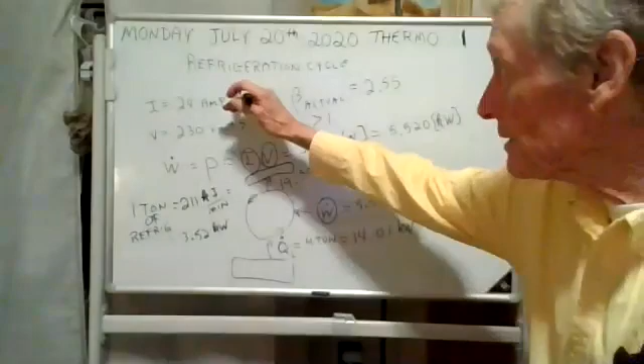Now that doesn't have any units because it's just a ratio, okay? And it's not a percentage. And there's something about this you need to know: it's always bigger than 1. Coefficients of performance are always bigger than 1, and efficiencies are always less than 1.

But there's my air conditioner, and you could figure yours now that I've shown you how to do it. You just have to read what it says on there about your amps and your volts. Okay, now we've done this, does anyone else have a comment or question before we do a heat pump?

Well, okay, if you're happy. Got to review some basic electrical stuff there, didn't we? Wasn't that fun?

All right, we're going to do a heat pump. I'm going to erase this unless somebody speaks up. Okay. All right, now we're going to do a heat pump.

Now let's go over the schematic first. Now the schematic looks exactly like a refrigeration cycle. It's counterclockwise, round and round, all the arrows are going like this. This is QL dot, this is your low temperature, this is your high temperature.

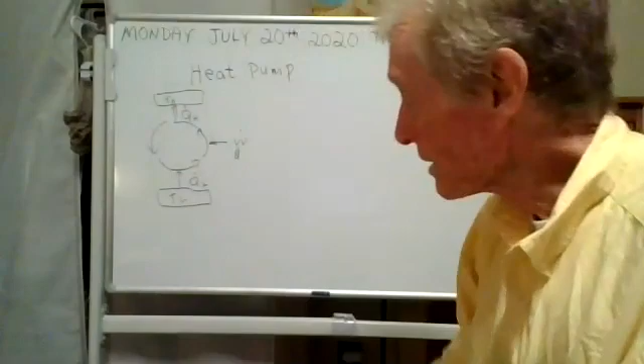The only problem is it costs money, you've got to pay for it. Because Mother Nature doesn't like transferring heat energy from cold things to hot things. The way Mother Nature likes to do it is to transfer heat energy from hot things to cold things. It has to do with molecules and their vibrations. I think they vibrate faster when they're hot and vibrate slower when they're cold.

Okay, we're going to do a heat pump problem. Now we need the equations here. Let's write them. I think this book uses a beta prime. And there's an actual, and there's a reversible.

Beta prime, what it actually is, is QH dot divided by QH dot minus QL dot. The reversible is TH all over TH minus TL.

There's your equations, they're in your book, they're in your notes. We've done them before, but I'm a believer in repeating stuff. Maybe if we repeat stuff, we'll get it.

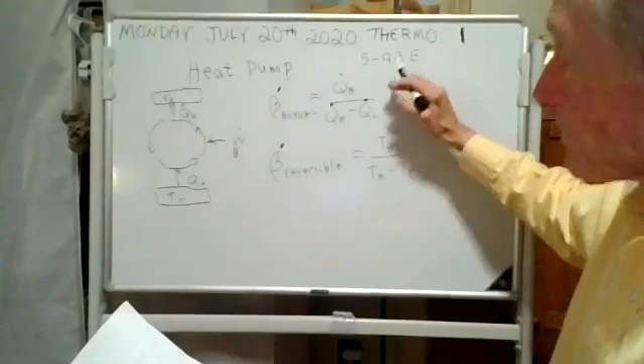Okay, now what I'd like to do is I'd like to do problem 593E. It's English. We need to know how to work in English, you know. Just because everybody else in the world, almost everybody, uses SI, we still use English here in America.

And we're looking at 593E now. Let me see if I can find it here. 593E. Found it, 593E. Okay, this is a problem in your book.

For those of you that just woke up from a daydream, we're going to do problem 593E. It's in English, senor. It says a large heat pump should upgrade 4,000 BTUs of heat at 175 to be delivered as heat at 280 Fahrenheit. I get the feeling this is the lower temperature of 175 Fahrenheit, and this is the 280 Fahrenheit. That's the feeling I get.

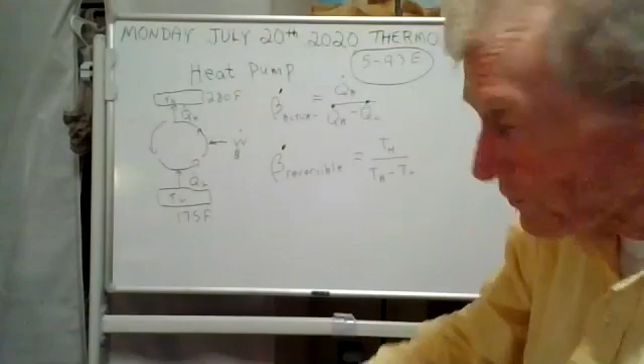What is the minimum amount of work, power input that will drive this? I think it's kind of like that last problem. We're going to have to set these equal. But don't we have to know something else? Let me read it again. Oh, yeah.

4,000 BTUs. I get the feeling this is 4,000 BTUs per minute. Is that what it is? No, per second. I wonder if that's what they mean. I think that's what they mean. Okay, well, let's try that and see if that's it.

Now, I'm not going to look at the answer. I do have an answer book, and we can look at that in a minute. But let's work the problem. Let's circle the stuff we know.

We got to have this in Rankine, guys. Roughly, I'm just going to do like they do. Roughly, you add 460. It's really 459.67, I think, but I'm going to be kind of lazy and put that in Rankine. Now let me do this in Rankine. I believe it's 740 Rankine.

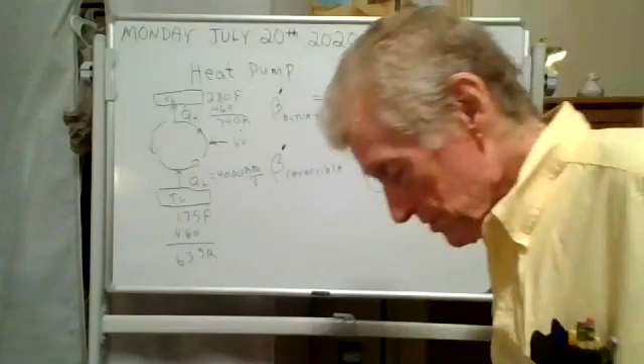So, hey, we know all of this stuff. Let me plug it in and see what I get here. That's 740 Rankine. And the difference is...

Is it 105? Let me make sure I didn't goof that up. Let's see. Yeah, that's right. Now, if you have any questions, just ask.

Okay, now we're going to set these equal. Now let me see what this is. 740. I'm getting this is equal to 7.048. So what we're going to do is say 7.048 is equal to QH...

All over QH, well, there's dots on it, minus the 4,000. Okay, those are BTUs per second. All right, well, we're going to solve that, algebra students. Let me shut up for a minute.

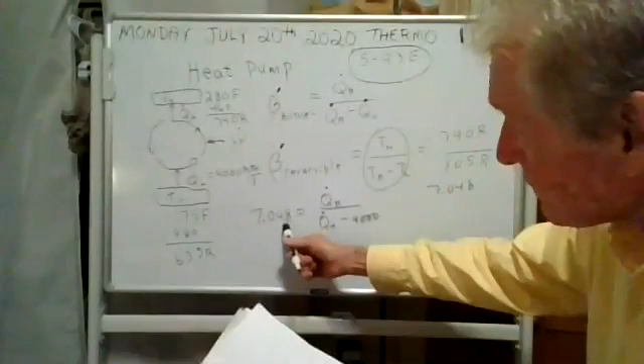And when I did this before, I got a different number here. Just a minute. I might have goofed up. I think I did that right. But let me double check.

No, I'm getting a different number here. Okay. No, I think we did that right. I believe we did that. Okay, I haven't figured this out yet. I can't do that without pencil and paper. So let me work on it. I want you to work on this and give me the answer.

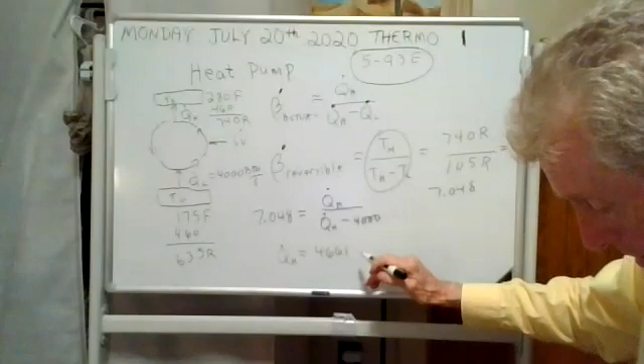Well, I wonder if this is what you got. I tried to solve this, and I'm coming up with the heat transfer rate at the high temperature is 4,661 BTUs per second. Did anybody get that?

Is anybody still with me? Let me look and see if there's anybody still out there. Yeah, there's a good crowd out there. You guys are faithful, you're sticking it out. Proud of you. I wonder if I did that right. Well, let me check it and see. Well, I'll know here in a minute.

Yeah, that looks pretty decent. Okay, guys, we've just figured out the heat transfer rate at going to your house. And this is the heat transfer rate coming from the environment.

Well, actually, this is not atmosphere. This is some manufacturing plant or something, because we don't have temperatures of 175 Fahrenheit in Oklahoma. They might get up to 105, but not 175. But this is a heat pump, but we're not warming up your house, okay? I mean, gee, if your house was 280 Fahrenheit, you'd be dead.

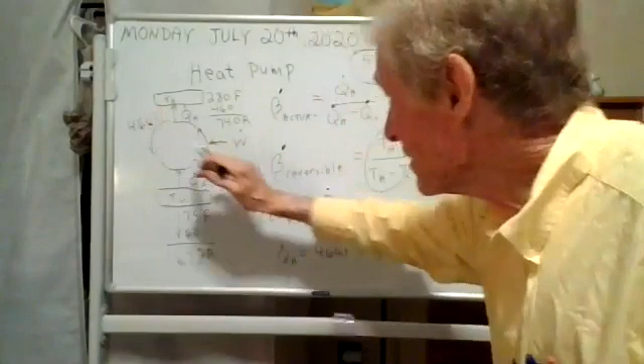You understand? It's a heat pump, but it's not, in this application, warming up your house. But we can get the power necessary, the minimum power necessary to operate this heat pump. If you know this is 4,000, and you know this is 4,661, then this is 661 BTUs per second. That's the minimum power that you're going to have to operate that heat pump.

Now, I don't know if I got that. I got an answer book here. Let me look and see if I have that one. What is that? 5-93E? I might have it. We'll look and see.

I don't think I have that particular one. You're just going to have to trust me that we did that right.

All right, well, we've done all three now. I've shown you those equations. We've done a heat pump, heat engine, and refrigeration cycle. Did anyone have a comment or question on anything?

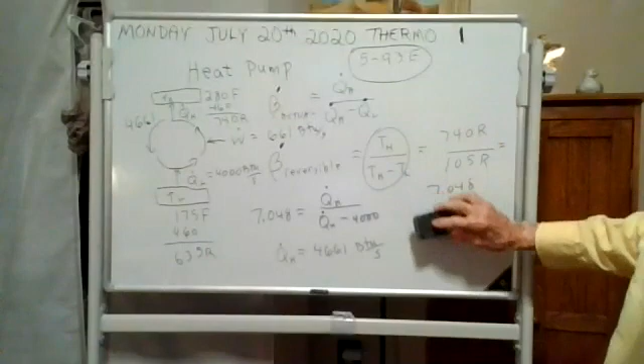Okay, we're going to say goodbye to this. We did a heat pump. Do you notice that the schematic is identical to the refrigeration cycle? The only difference is on the refrigeration, you want this down here. This is why you have it. With a heat pump, you want this right here. This is why you have it. That's the difference.

And the equations are different for the betas. The fancy name for this is coefficient of performance. Okay, well, let me say goodbye to 5-93E. We did a heat pump.

Let me just mention one thing about a heat pump. I wish I had one. Really, the key idea, I don't think I've ever told you, the key idea, let's say this is 2, this is 3, and this is 5. And they could be megawatts, okay? I'm just making that stuff up.

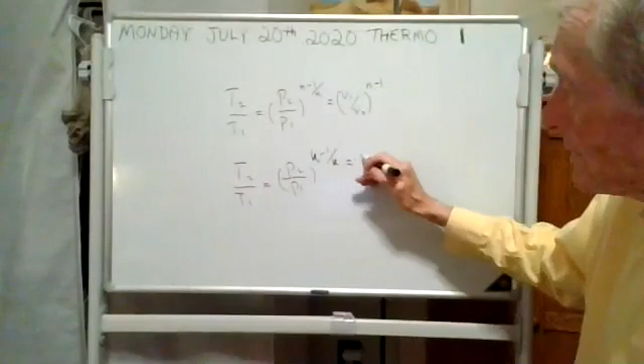We derived these equations from scratch. And there's another one just like it that goes like this. And Wednesday, I thought we'd review those two and talk about when they can be used.

See, it's one thing to have a lot of equations at your disposal. Like that one earlier we talked about with the skull and crossbones. Remember this one here? It's a lovely equation. But when can you use it? If you use these equations on the wrong application, you don't get the right answer. We have to know when you use these equations, when you use the tables in the back of the book.

It's kind of a review. I think it'd be good for us on Wednesday. If you want to study those over so you'll know what I'm talking about on Wednesday, that would be good.